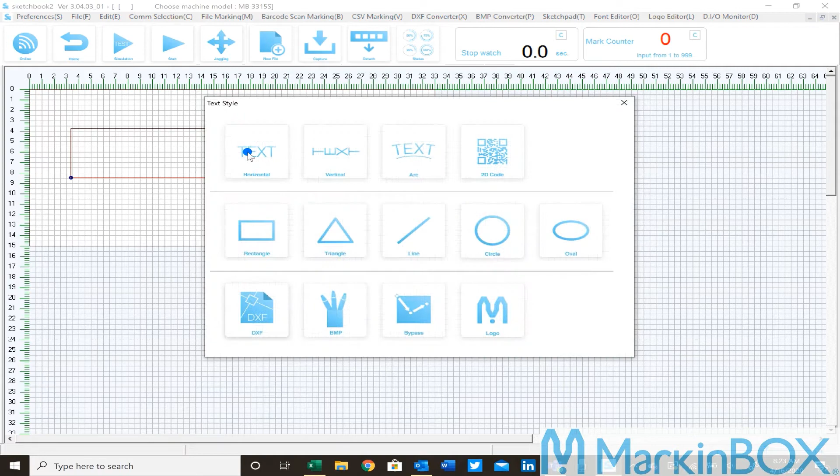Now we're going to select More. This is going to give us additional settings for our text fields, everything from mirroring the image, pause functions, reverse marking, logo marking, serializing, and calendar. For this example, we're going to do serial.

Now that we've selected serial settings, we need to understand the different formats. Our first format is going to show the zeros of the max value. Secondly, you're going to be aligning the serial number to the left with no zeros. Third, it's going to align to the right with no zeros. And finally, you're going to be counting up using alphabetical characters.

Now we can work on our text. First, we're going to type out a set of static characters and then use the format with the included zeros.

Under max value, we're going to set it at 99, with a min value of 1 and the present value at 0.

Then we're going to have it reset at a max, so it's going to reset at the max value, or at the end of the year, the end of the month, the end of the day, a specific time, or at the end of a shift. And then with the stop, it will reach its max value and then set off an alarm that will need to be reset by the user.

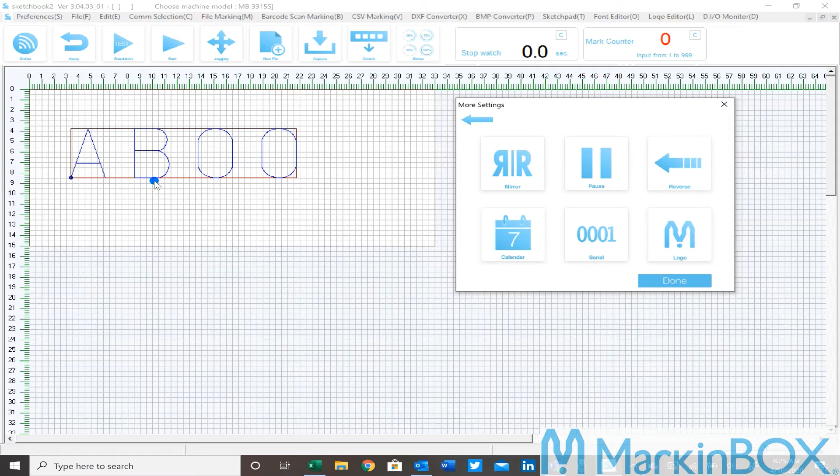Now that we have our serial settings finalized, you will notice in the grid we have our A, B, and 0, 0. We'll select Done, and in the properties you'll now see AB and the @ sign. Everything from the @ sign to the right will be your variable field.

Now we can adjust our other settings. So our height we're going to change to 4.5 millimeter tall characters. Width we're going to leave at 60, and our pitch we're going to change to 5.2.

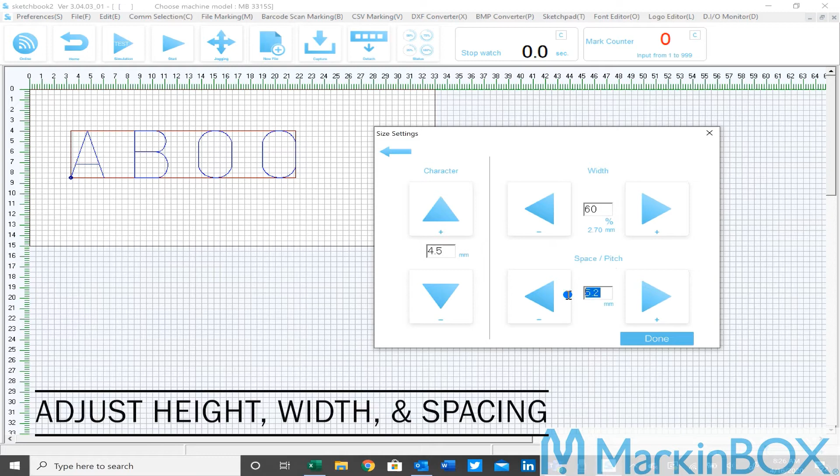Next we're going to change our force and speed. Again, we have our defaults, but we are going to use advanced settings. Our force we're going to set at 20, and our speed we're going to set at 20 as well.

Then we can move on to our positioning. For our X, we are going to change that to 1 millimeter, and our Y to 5 millimeters. Once we have these settings finalized, we can now move on to the marking process.